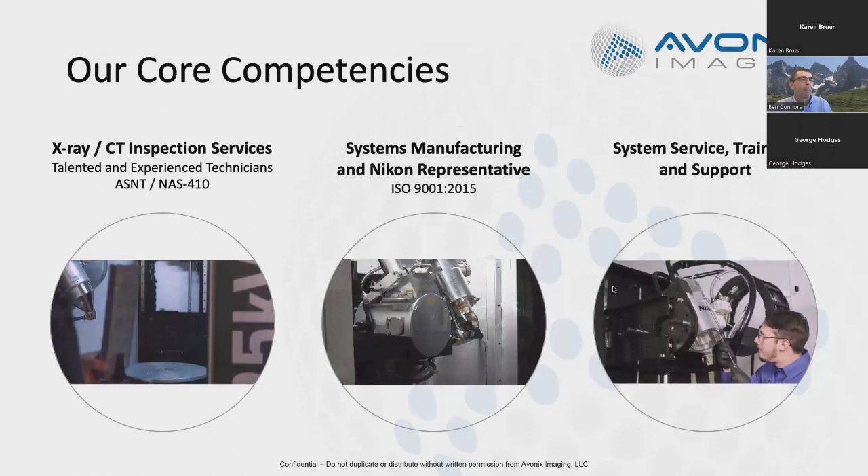What motivates us? This is a big one that keeps coming up. When we're looking to build a team, core values is really one of the key components. As NDT people we often talk about certifications, qualifications, hours, all that stuff. But a couple years ago as a team we went through: what are our core values, what do we really want? We believe the goal - everything we do - should result in mutual success for our company, employees, vendors, strategic partners, and most important, the customer.

We achieve that mutual success by challenging the boundaries of human ingenuity, technology, and the X-ray products and services we provide or deliver. That leads to the quality and safety of the things our customers do - whether it's a rocket, a heart valve, or a car. Anyone in NDT, anyone in CT, you're looking at something really important. So we strive for mutual success because everyone in that whole environment has to succeed. We summarize it as ACE: authentic, competent, and empathetic.

On authenticity: show up joyful, humble, imperfect. We actually had some spirited debate on 'imperfect,' and I'm really glad it's in there. If anyone wants to raise their hand because they're not imperfect, let me know - I'll take your class. Also, grateful to serve others - that's really important to us.

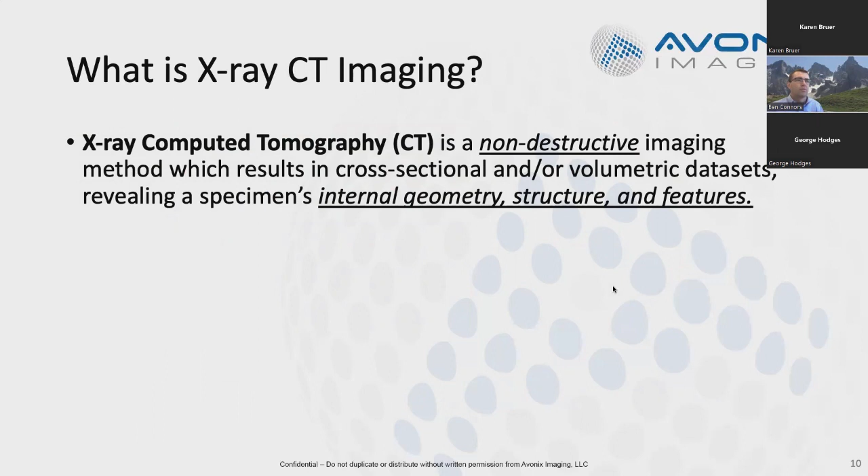So what is X-ray and CT? Again, I'm burning through this pretty quick because I think we've got an educated crowd. X-ray and CT is a non-destructive imaging method which creates cross-sectional or volumetric data sets revealing that internal geometry. I think we all know what the medical CAT scan looks like—the tube and detector spins around the body, and you've got one center axis of rotation.

And in the industrial world, we like to joke that we don't care about our patients. So in this case, the part rotates and the tube and detector remain static for the most part. There's a couple technologies where that's not always the case, but for the most part it's spinning, tube and detector static.

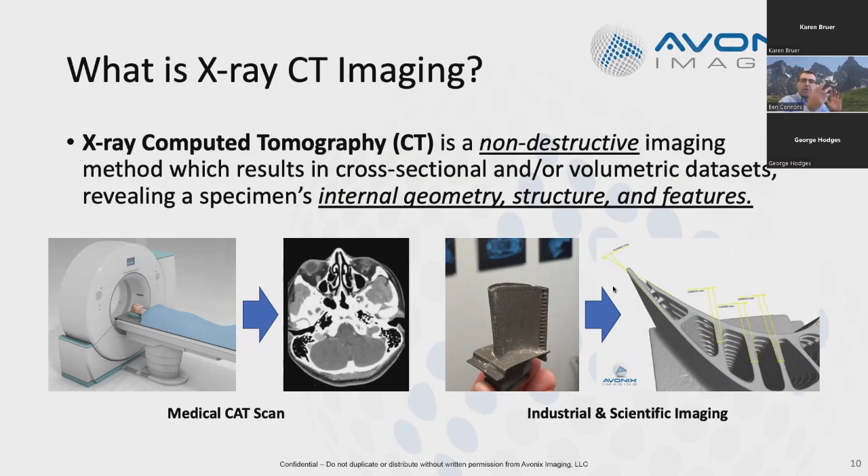So the physical layout of that—we've got basically an image of a system here. On the left, we've got a detector. Very commonly that's either a 4343 or a 1621, some kind of a way to receive the photons. Lower down, we've got a CLDA, or curved linear diode array, that's shaped to that cone of radiation so that we would have the same ray length, whether it's on the edge or in the middle.

On the right-hand side, just a couple different example X-ray tubes: RT 450, or rotating target 450, static 225, and a minifocus 450. So that's the general layout of a CT scanner.

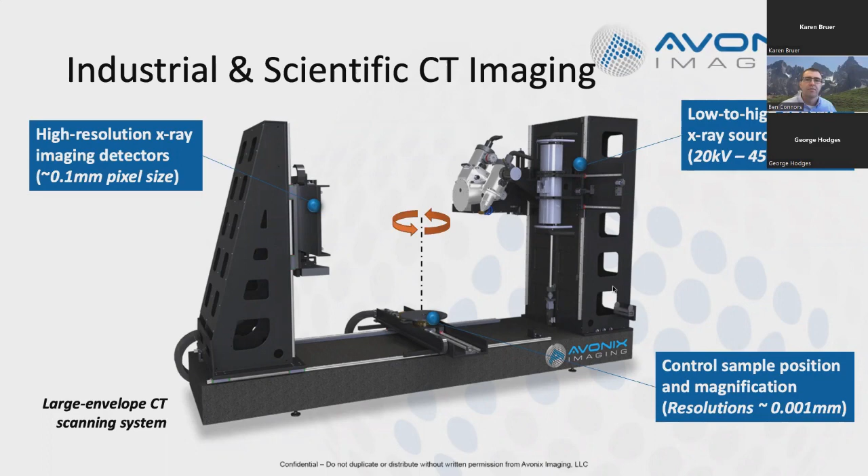Once we would put a shell or some shielding on top of that. Some people use a concrete bunker; others will have some kind of lead steel construction on the outside. So you've got shielded doors that are interlocked—if they open the door, it unplugs the X-ray. Radiation effects to specimens are pretty much always okay.

There are some nuances—typically space grade electronics or medical device electronics are the ones there'd be a concern with. If we run into that, you usually need to go back to whoever built that electronics or whoever's speccing that out, and they can articulate what kind of dosage that sample can take. But it's pretty rare—most of the time whoever's bringing a product like that in is going to know that it's radiation sensitive and that there's a concern. And then, of course, a shielded cabinet keeps us all safe. So that's kind of the geography layout.

So workflow: as parts process through an X-ray machine, scanning and X-ray acquisition is fairly straightforward. We just take 1,500, maybe 3,000 images as that part rotates. A pretty common effort is to figure out Nyquist, or figure out how many X-rays I should take based on what I want to see. Sometimes you can pull that back if you've got ROIs or different things that tell us I'm still seeing my defects, and then you can speed up a little bit.

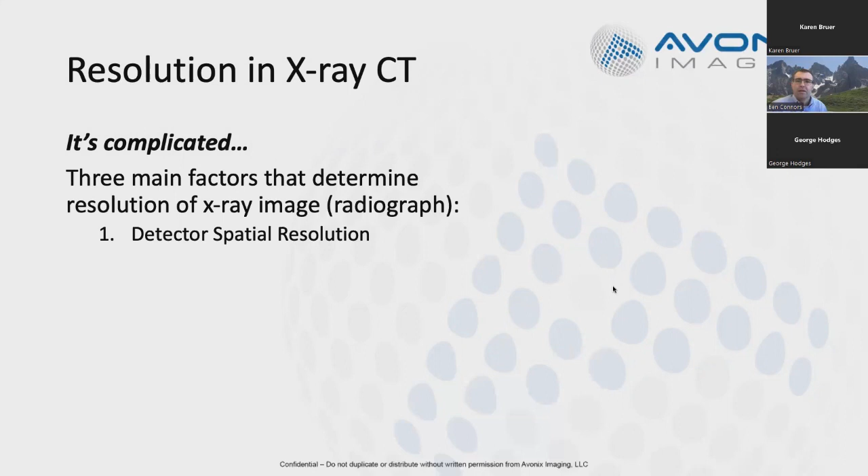So resolution, X-ray and CT, it's complicated. Sometimes people say it depends. The three main factors that determine resolution of an X-ray image or radiograph is detector spatial resolution. So smaller pixels, we get better resolution on paper, but smaller pixels are also less sensitive.

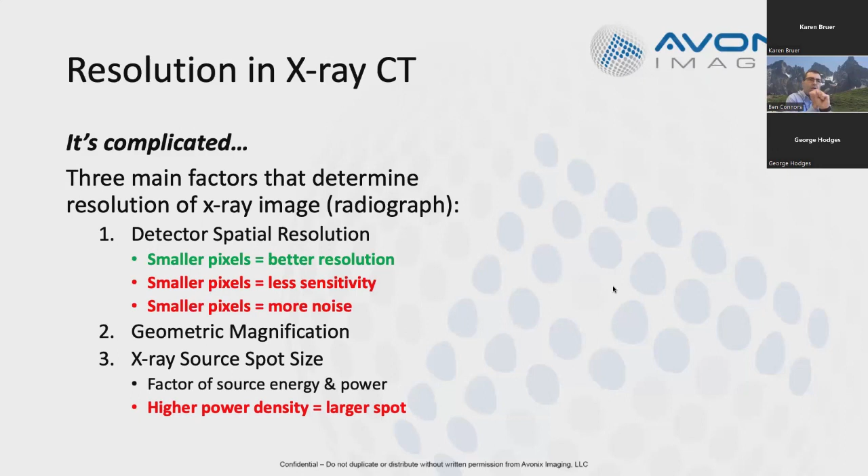It's a smaller photon bucket to receive that radiation, and smaller pixels are more noisy. Geometric magnification is another factor, and I'll get into each one of these. And then focal spot size, the factor of source energy and power - the higher the power density, typically the larger the spot. So if you want a really, really small spot, you typically have to turn that down, and I'll talk about how to deal and manage with that.

Imaging resolution - like I said, pixel size, smaller pixels, they're not always better. They can be, but they can also cause some challenges. One of the things is that the scintillator has to get thinner as our pixels get smaller, because if you have a really thick scintillator, there's a possibility of light landing on a pixel that we don't want.

Maybe that isn't the best process. It's got less active area, so that means we'd have to basically let it soak or light up longer, so more imaging time. And then more pixels, more problems. So anyone who's gone from a 200 to a 100 micron panel, or even 200 to 150, you end up buying a lot of back-end IT stuff to store more, to manage more, to transfer more. So that can be a challenge.

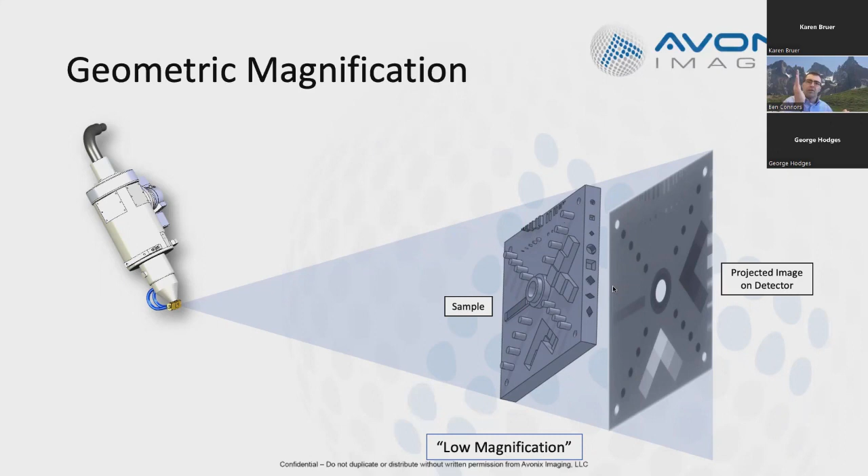So geomag again - I think we have mostly experienced people here, but it lays out fairly simple. If we've got an X-ray tube on the left, a detector or an image on the right, and we've got a sample in the middle, relatively low mag, relatively close to the panel. And then as we mag up, we can certainly increase that resolution. This is the purest or cleanest way to improve our resolution. It's just like if you're taking a picture of something, you grab that lens and twist it. That is the most pure way to get magnification or a better image.

But in this case, as we magnify, then we're not getting my whole part - I'm only getting an AOI, or an area of interest, of that part. So source to detector and source to object distance is really the calculation, pretty straightforward here. The way I like to think about it is tube to detector here and here. Halfway between is 2x mag, and every time I cut it in half, I double my resolution. So 2, 4, 8, 16, on and on and on.

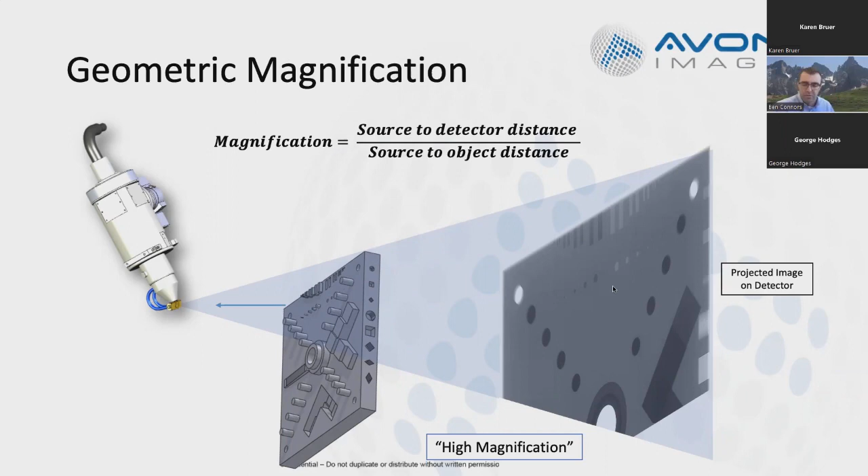And the image that we're showing, we'll flash that a little bit as we walk through here. So this is a sample that's not made for CT scanning at all - it's actually terrible. It's a little Inconel piece that's made for testing 3D printers. So they have pins that stick up, holes that go down, steps - these different features - and they want to see if the printer works well.

So it translates well if you can CT scan something hard and see some void or defect or feature. That translates very, very well, especially in the aerospace additive world, where they don't make perfectly round things - they make all kinds of different shapes, and we're able to see some of these defects, and it helps when you're trying to prove out.

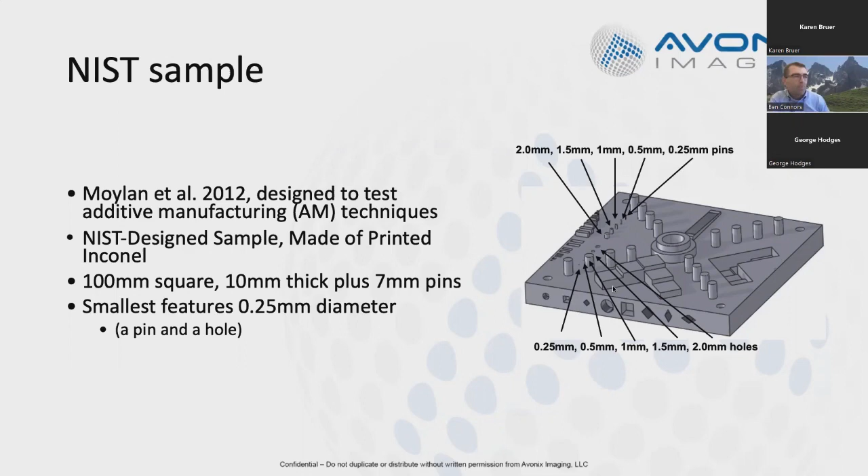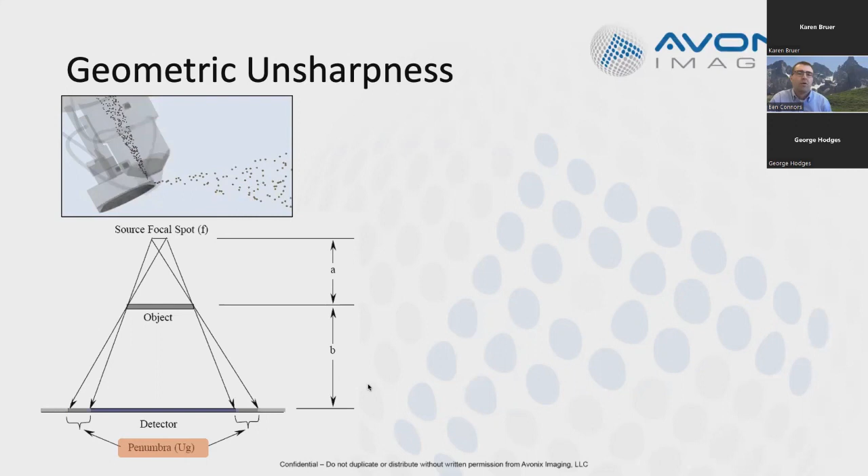So same detector, same mag - the main difference is, you know, in school what they referred to as the UG factor, geometric unsharpness. So that's just the physical focal spot size, the penumbra effect, as well as that magnification. So that's a consideration that all of us need to keep in mind as we're using geomag, because you might want to drive that tube a little bit harder wattage wise. But regardless of the tube or tube style, as we drive that wattage, that spot size has to grow, or we're going to have an electron beam welder, and we don't want that.

So again, that was more of the simple end of X-ray and CT. Some of the advanced stuff now - I mentioned some problems and maybe how we can get around some of those problems.

So one of the challenges in X-ray, and this is just pure X-ray physics - we've got a vacuum tube, we boil electrons off of a filament, they accelerate in the vacuum, they impact that target, and about 99% and change of that energy turns into heat.

So we all have to manage or deal with that. The last 0.3% of energy turns into an X-ray photon. So in a static target, there's finite heat dissipation, and this is true regardless of whose brand name you're talking about. If you want to crank up the kV, you'd have to have very, very low wattage, because voltage and amperage equals wattage.

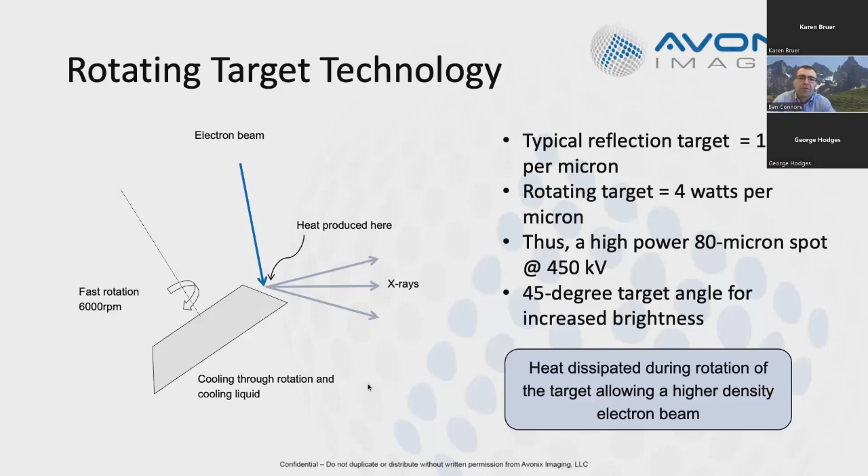So for general spot sizes, if you're trying to get your head around what's possible: at 450, 80 microns, 100 watts, that's what's published. We've got pretty confident evidence we're down in the 50s there, but that's what we publish. At 450 watts you'd be at about 113, and the 225 at 30 is 10, and 160 at 450 watts.

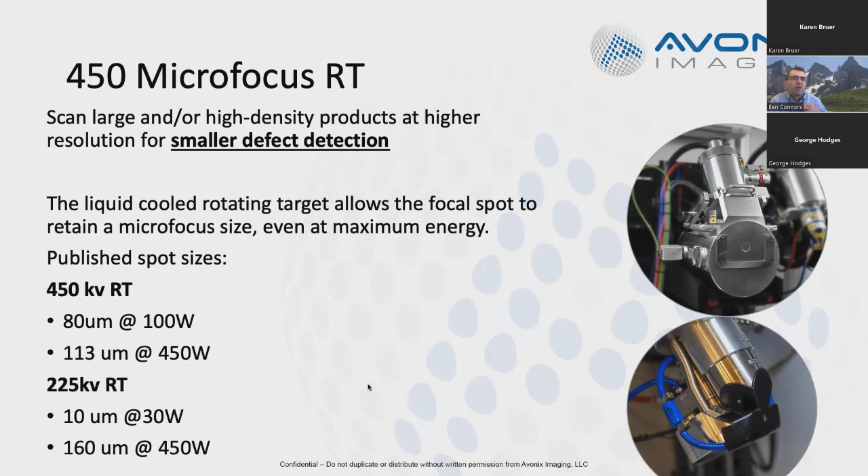So that kind of gives you an idea of being able to do a scan differently. A couple other concepts - and again, some of these might be our trade names, I know others have other trade names - but what we call helical is basically made for long, skinny parts.

So you would put a part in, let's say a pen, or maybe a baseball bat or something like that, long skinny parts. And when we talked about geometric mag a little while ago, if I mag up on this pen, I would only get the ball point at a high mag.

Let's say I'm trying to do a 10, 15 micron scan on it. Whereas with helical, or some concept like that whatever brand name you look at, you're able to spin that part basically like a candy cane all the way up. So we clean up some of these artifacts, clean up some of these defects, and you don't have to stitch anything together. It's pretty slick, we use it pretty often.

And we can go out to about half of that cone and spin the part, because all that part goes all the way through. I think George might even have some teaching slides on this - you really only need about 180 degrees of rotation to get a good CT scan. Typically we do it for a lot of other artifacting and other reasons, but that's kind of a slick one, the offset CT.

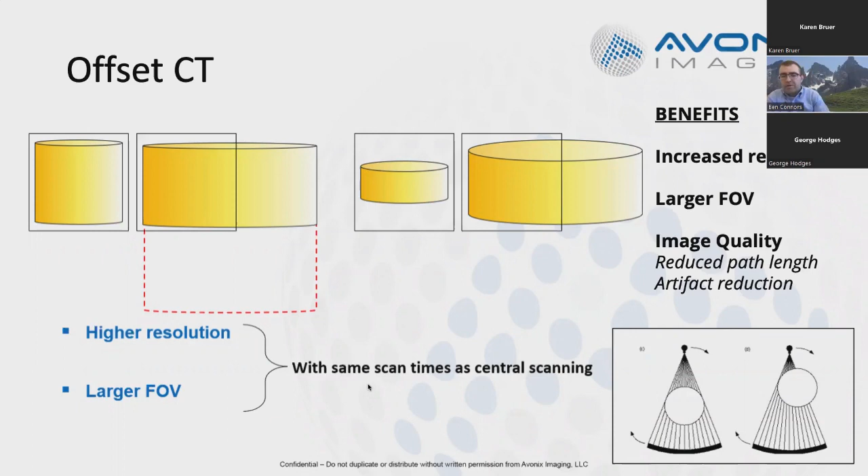And pixel push. So if you've got a spot size of a certain amount, and you're trying to squeeze out that last little bit of resolution for whatever the case may be, I think Nikon came up with this first, but there's others in the market. The idea of pixel push is basically that the panel moves, moves, moves, moves. I think I've got an illustration here.

So it's 4 CT scans, so it's pretty data intense. But what we're doing is splitting those pixels in half. If I identify a dark or light spot, a defect or anomaly in this area, and it shows up only in that bottom corner, you would then have enough overlapping for that to light up and basically show.

You've still got some issues with the detector. It's not a 1-for-1. Like if you've got a 200 micron panel, you're not automatically at 100 microns. But it does help to squeeze out a little bit more, and does help to improve.

And then of course we check our panels. A lot of the aerospace work that we do, we're driven to test our panels, test our CT scans, test our people. When you're scanning things that fly, it's very important that we're confident on the quality of our product and what's happening there.

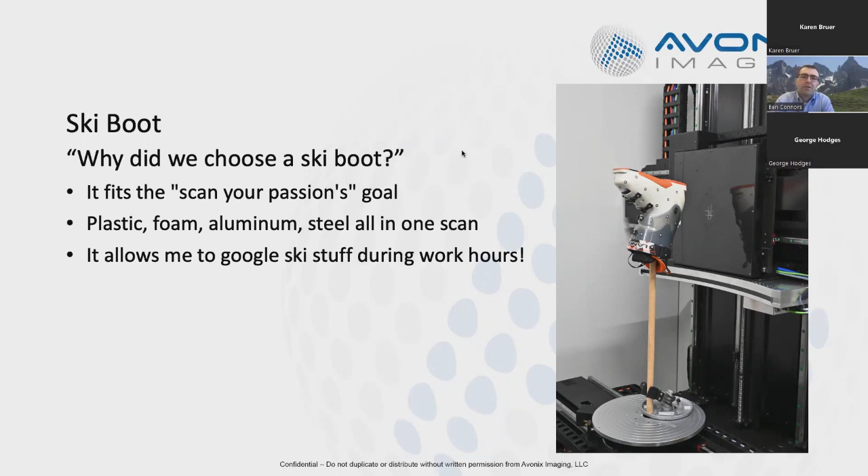So out of that, we picked a ski boot to CT scan. Why did we choose a ski boot? It fits the scan your passion goal—plastic, foam, aluminum, steel, all in one scan. So it's a tough scan, right? Low density and high density—that's a hard mix. And frankly, it allows me to Google skiing stuff during the day at work.

So the physics of skiing. If you back up a little bit, X-ray is just applied physics, right?

Skiing has a lot more to it than one might think. We've got a snowy surface, a slippery ski, and the angle of that hill or mountain. Typically we rate the angles of that. Green is for little kids skiing, double black is expert. So there's different hill ratings.

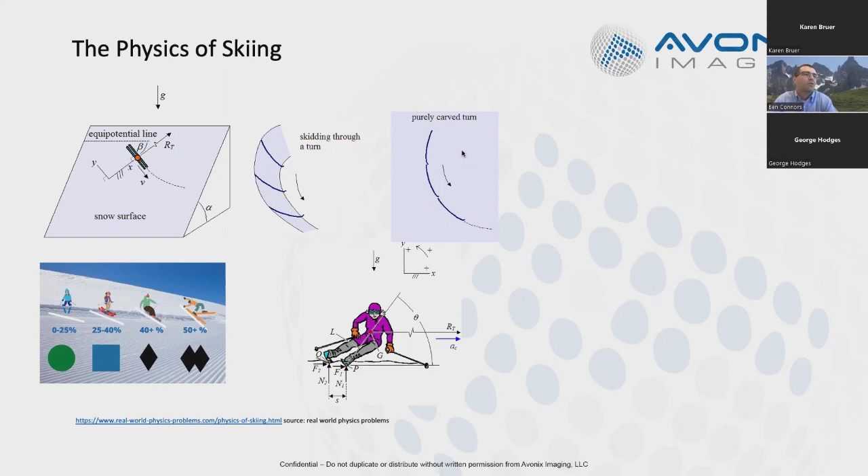Ultimately the physics of skiing is you want to make a turn as you're going down the hill. Some of it is to control your speed, but some of it is it's really fun, right? Maybe analogous to a motorcycle on a curvy road. You kind of get that pendulum feel in your stomach.

There's a lot of physics that go into that, from the steepness of the hill, the position of the skier, to which ski is engaged more, in a really high carve, perfectly pure carve situation. When you're carved like this, that ski is bent backwards, almost like a leaf spring. And as soon as you flatten it out, it's going to pop you and you should hit the next one. If you see a racer or a video of someone skiing, that's the perfect situation where the energy of that ski and the energy of gravity makes it really, really easy. Whereas a skidded turn is a whole lot more work.

The couple things we think about in skiing is center of mass, the three-dimensional balance point of an object. In a skier, it's going to be your pelvis or hips, something like that. And then base of support, which refers to the area beneath an object or a person. Every point of contact supports that surface, and the boot's the most integral part of that.

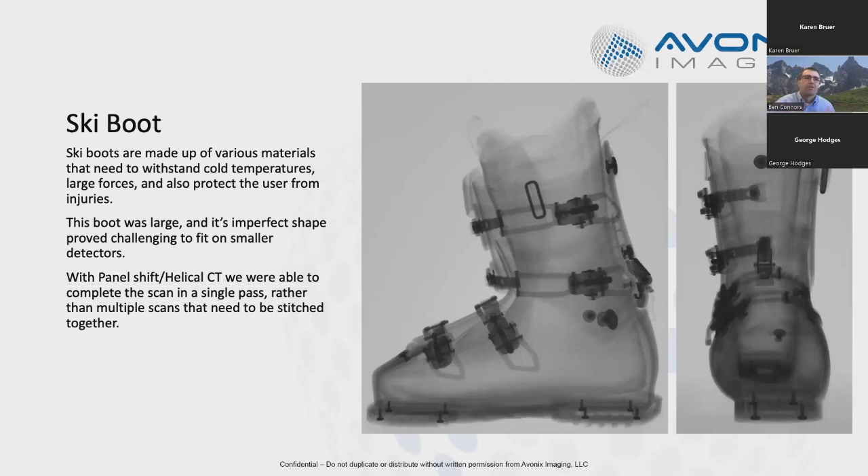This boot doesn't have a perfect shape. Nothing does. It's basically rolled up plastic, but if you unbuckle these boots, they'll kind of go like that over time. So we use panel shift helical to be able to get that in a single pass rather than multiple scans that would need to be stitched together.

What are we looking for in CT? In this scan, honestly, mainly for fun, but we're also looking at the liner to boot fit, the buckle construction. One thing that's perplexed me forever is the walk versus ski latch. I think this is true in skiing, but also golf, fishing, and a lot of other personal activities - they've got these little widgets and you're like, man, that looks cool in the store. Then you get it home and you're like, does it really work? And then you just move on with your life.

So we'll talk about the walk versus ski latch, general defects, voids, cracks, things like that. And then clues to a good fit. The saying is the perfect boot should be just like Pink Floyd, comfortably numb. So that's really what we're looking for.

So I've got a slice video here and it goes a little bit quick. Sometimes I just feel better if I slice like we're slicing through VG. In this case, this is the bottom up or top down type of view. So we can see some of these different fitments.

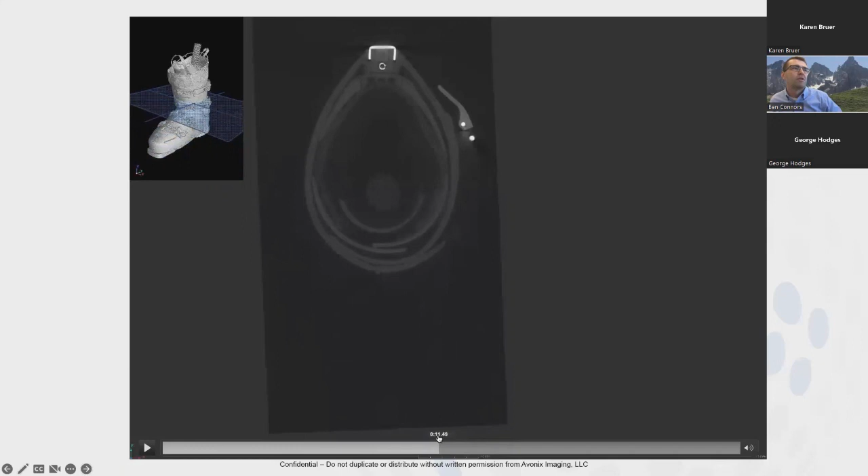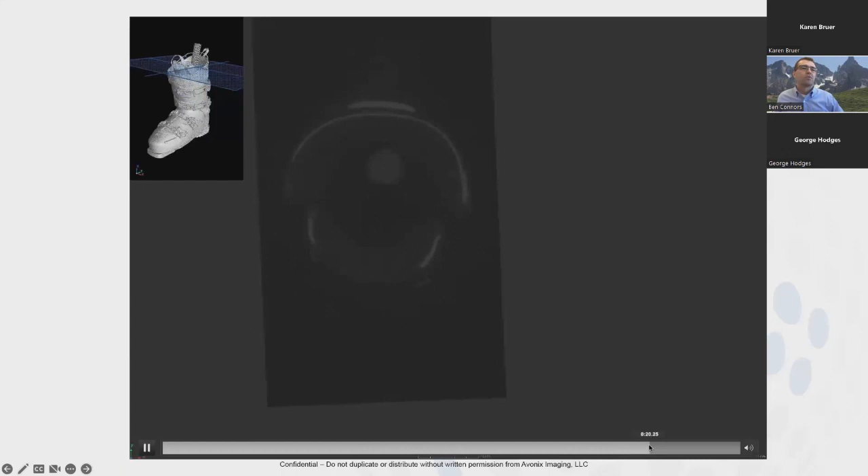If we look way up at the top, I'm actually able to see some voids and defects in that little ski boot latch. We can see how the buckles go together, how the liner goes in, all of that sort of thing. Honestly, the most fascinating one, but we can't do it because it's not safe, would be to buckle that on your foot and then take a look.

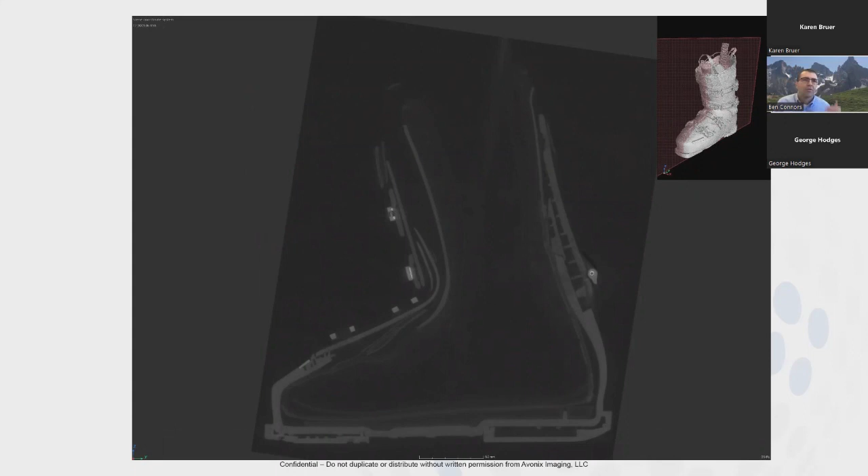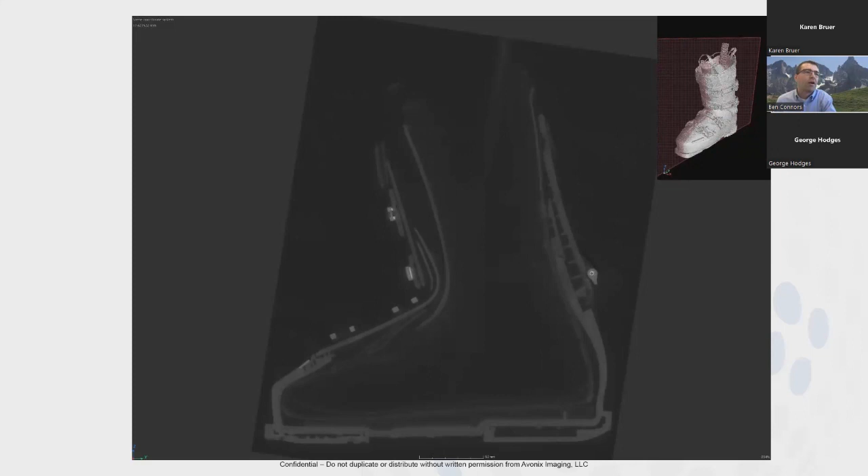The next one here is just a side view of the same, and there was actually something interesting here. If we look at the bottom right on the heel, you see how that liner has some space with the outside shell. Anytime you put on a ski boot, you should tap your heel about 3-4 times to get that heel all the way back. If you see that little cupped area, it's kind of hard to get the boot on. So you want to tap that heel 3-4 times on the ground before you buckle up, and it'll push everything back and fit better. These may seem like small movements, but it's the difference between being unbelievably tired or not at the end of the day.

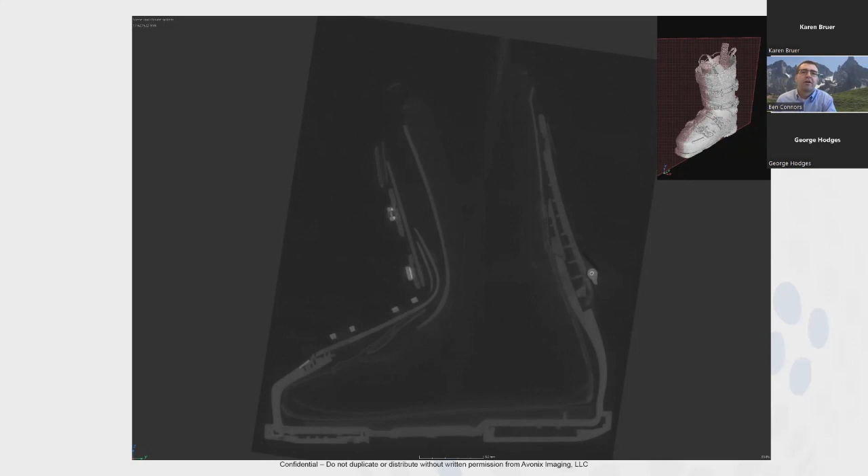So yeah, bottom up slicing and slicing on the side.

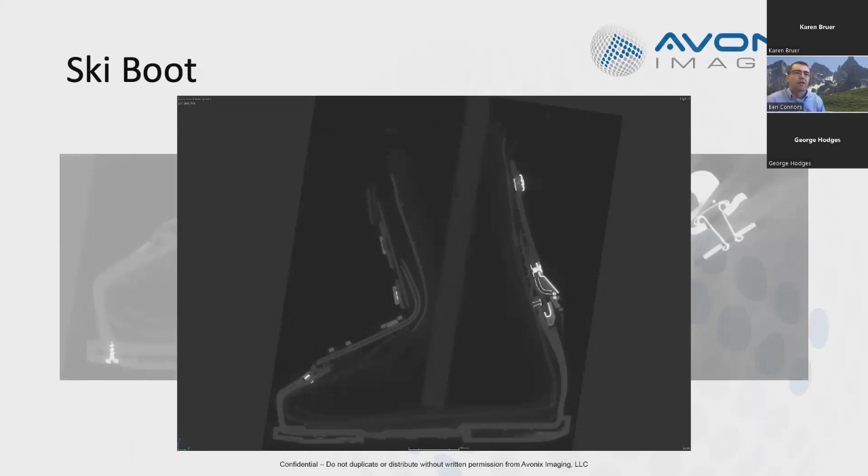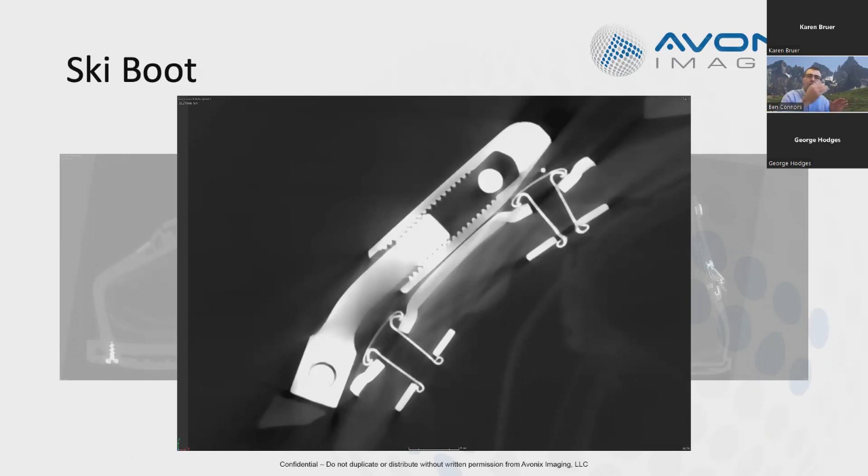And then we just took a couple of screenshots. We obviously had a stick in there just to hold it up to do the scan. And then a buckle—this is kind of interesting. All those buckles, not all of them, but very often actually have a screw. So if you latch something and this one's too tight, the next one's too loose, you can actually make a fine adjustment there.

And then we were hoping to find something. We did a high mag on just the toe, but it really wasn't anything too fascinating.

So the technique info on the toe, or the AOI scan: 220 kV, using a Varex 4343 and the Microfocus RT. The helical scan, we just put it on a bigger system for geometry reasons—so a 440, the 450 RT. We certainly didn't need that for penetration; it was honestly probably just a bigger box, with a 4343 panel.

So the next Scan Your Passions one is Mac. Mac is really into music, specifically he's always been an enthusiast of records. I didn't know this till we started our Scan Your Passions activity, but apparently digital audio files get compressed to make the files small enough to store. That part I knew, but vinyl doesn't do that, so there are little nuanced audio pieces that can be lost. It's kind of turned into this cottage industry and activity, and Mac's pretty deep into it.

So the other big deal, I think—and again, probably dating myself—but for some of our younger teammates, the idea of getting a whole bunch of songs all in one place is, now, cool again, I guess.

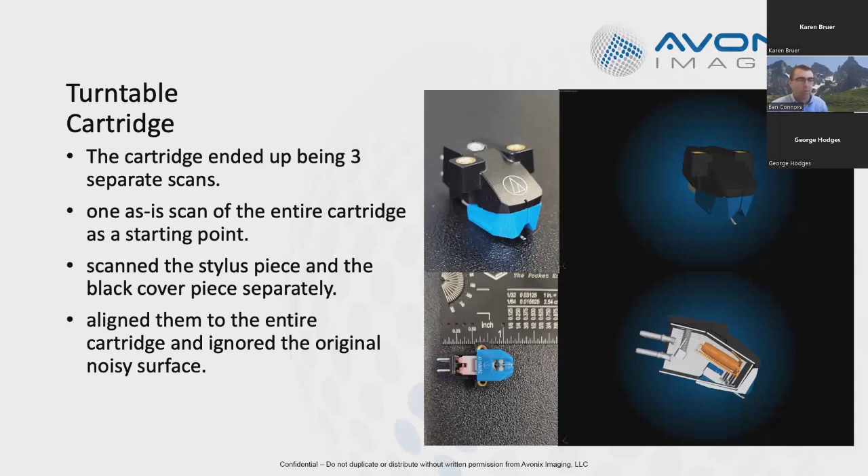So here's Mac's work, and obviously did this in VG for anyone that's not as familiar with X-ray and CT.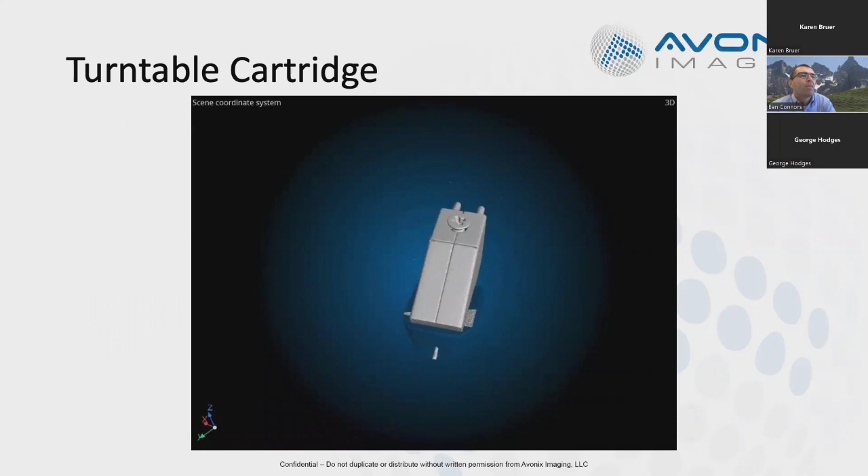And his technique info: the cartridge, stylus, and cover were all at about 220 kV, using the Nikon Microfocus RT, and a 1621 detector was used across the board. He did try and scan an actual record, but it really didn't turn out to be much—any of the bumps in that, you'd have to break a very, very, very tiny piece off.

And at this point in the presentation, everyone knows about geometric mag. So if I've got a record spinning around 360 like this, I'm not going to get really high mag—it would have to be really, really close to the face of the X-ray tube.

So the next one's a model train. Jeremiah in our lab is a collector of model trains, and the materials in that locomotive are primarily plastic or low density cast alloys.

He did have to do a little bit of disassembly. The shell is made of styrene and Delrin. Zinc tin alloy is for the chassis, which I found kind of interesting. I had toy trains when I was a kid, but they were all metal, whereas they actually use that extra weight so they keep contact with the rails. The dense components are steel pins and screws, and other materials are brass, copper, and printed circuit boards.

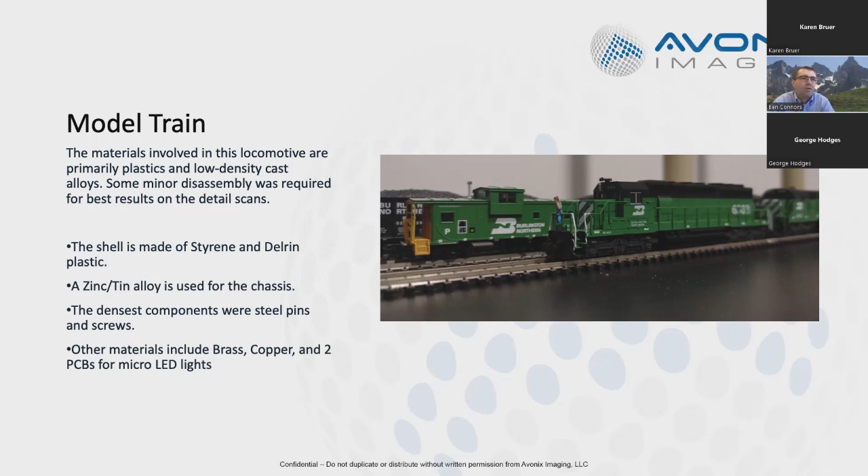This one actually did find something kind of interesting. We scan complex assemblies every day of the week, whether it's a medical device, actuators, or different components that go into the aerospace world or automotive world. All of these materials are very common to see in a CT lab.

Sometimes people have problems with their parts. In this case, Jeremiah actually bought one of these trains online. There's a particular one he was looking for, and the drive gears would bind or stop. What he found is that he was actually missing one. Of course, whoever sold it to him didn't anticipate it was going to get CT scanned, but that worm gear was missing. So it ran at about half the power, half the speed, which was very interesting.

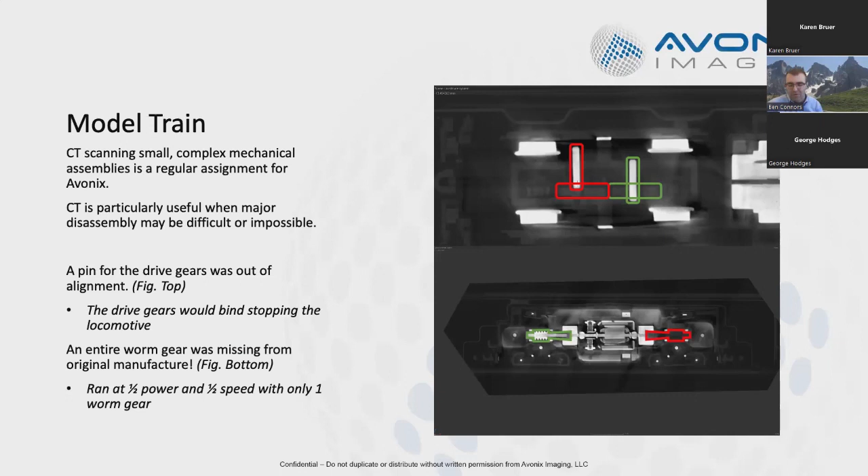And so with that, Jeremiah also threw together a pretty cool video here.

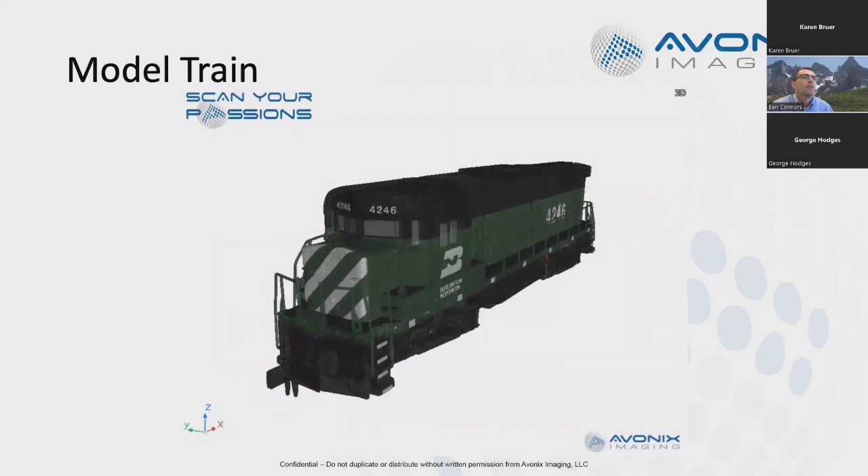With the multiple scans, I believe he basically overlaid these within Volume Graphics - the low density and the high density, as well as the total scan, so that you can surface things differently, more for show than anything else. But that's not uncommon for customers to need this level of information, especially if they're reverse engineering something.

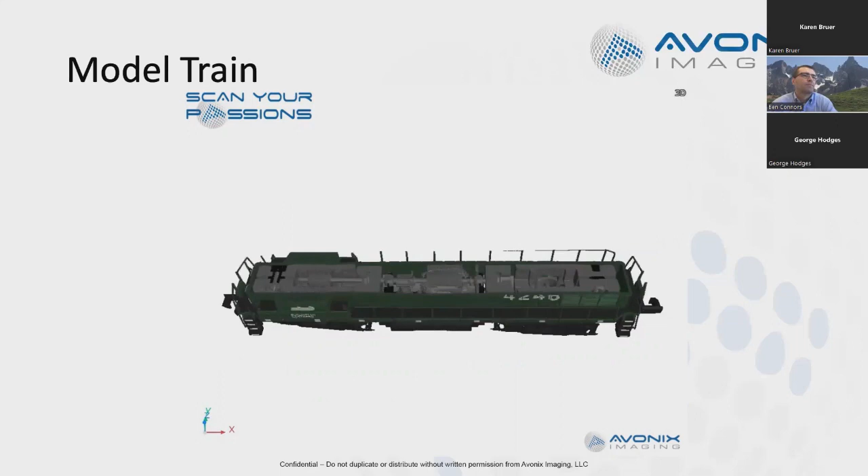All right, so technique info: use 220 across the board, and then reflection on the whole train. He used the RT on the plastic scan and the reflection on the metal. Honestly, I'm going to take a stab at it and say that was probably availability that day more than a technical selection, which anybody that has a few X-ray machines, that's also a real world situation.

All right, the Xbox. I think Justin presented this at ASNT Digital, maybe. This is kind of a cool story. Different people, different passions - Justin is dominant at fantasy football and at gaming.

In the early 2000s, the Microsoft Xbox had an issue called the red ring of death. After they shipped these parts out, they basically didn't anticipate that some of these gamers were going to sit there and play on their machine for 12, 14 hours at a time, and it would end up heating up. So there were cracks in BGAs or cracks in the circuit card that would open up when they're warm, close up, open up, close up. It was known as the red ring of death because there were basically 4 red quarter circles that would light up, and when all 4 of them were lit up, your system was dead.